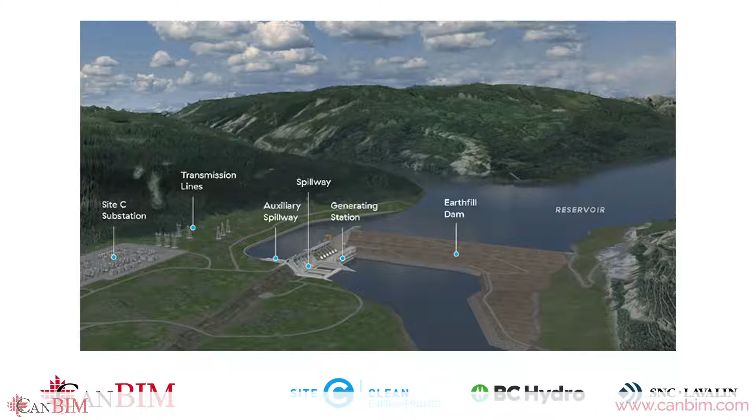So here's an image of the final product after construction. We have the 1 kilometer long earthfill dam on the Peace River. In the back there we have the substation and the transmission lines, and what we'll be talking about today is the generation station and spillway, which is comprised of 4 major components: the powerhouse, the intakes, the penstocks, and the spillway.

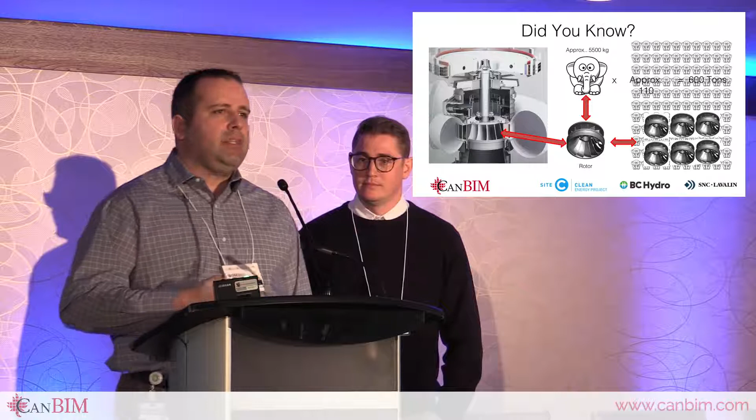Okay, so we have an elephant. That's a white elephant. I don't want to talk about any white elephants related to the project as far as what you've heard on the news. But I do want to make some quick comparisons, some fun facts about the project, and we're going to use this elephant to put it into perspective. What you're looking at here is a slice through one of the turbine and generator units. If we look at just one of the big components there, that's a rotor, and we want to compare it to one of these elephants.

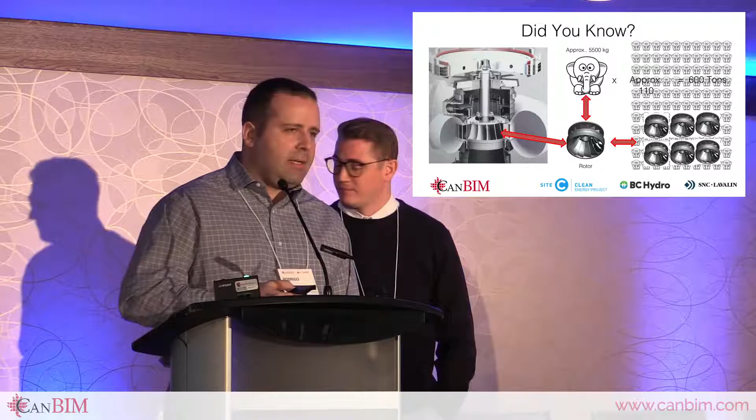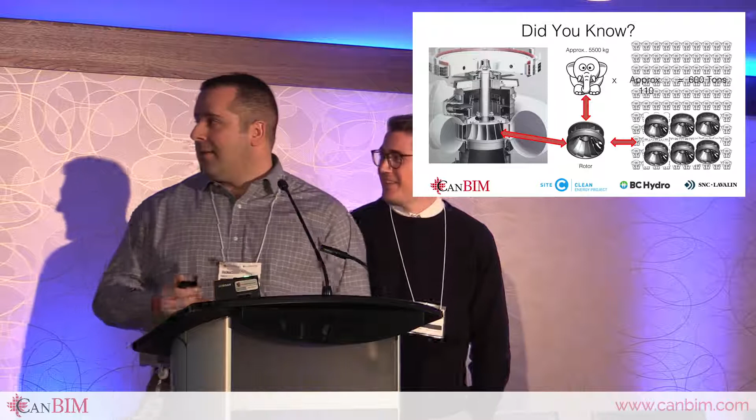Now, a full-grown elephant is approximately 5,500 kilograms. Can anybody guess how many of these elephants it would take to match the weight of that rotor? Any wild guesses? 4? 20? It would take approximately 110 elephants to match the weight of a 600-ton rotor.

Okay, so these are big, heavy parts that we're dealing with inside of the project. Besides the size, we're also dealing with a lot of complexity and a lot of weight, a lot of things that are challenging in here. And of course, there are 6 of these inside of the powerhouse alone, because we have 6 units that are going to be built inside of the powerhouse.

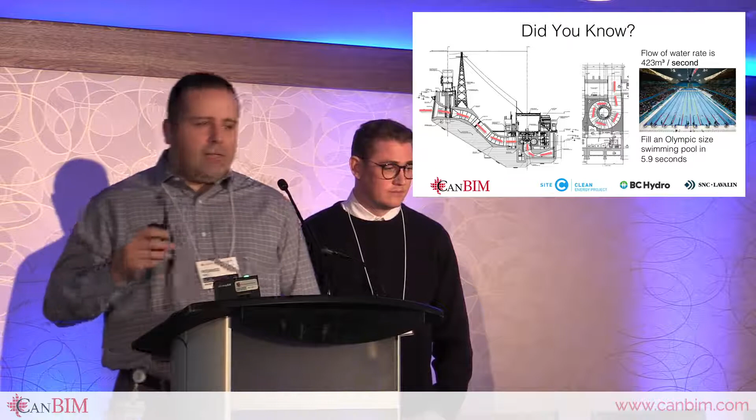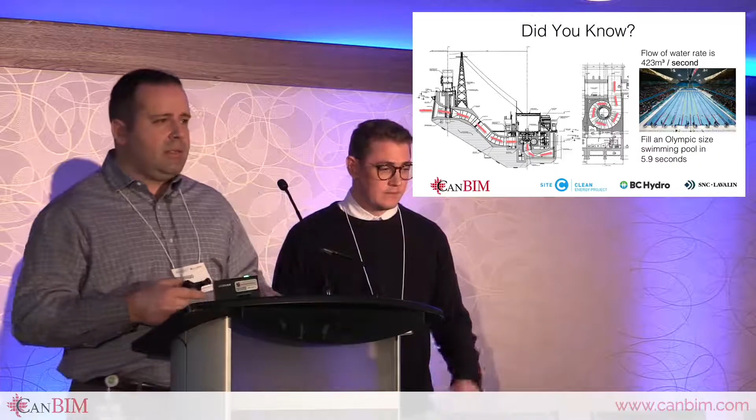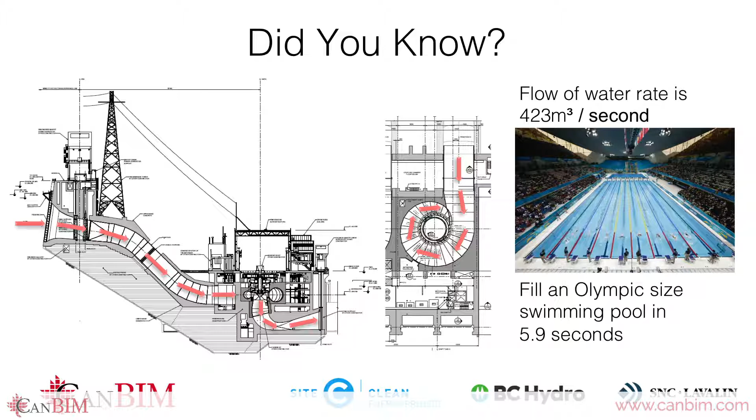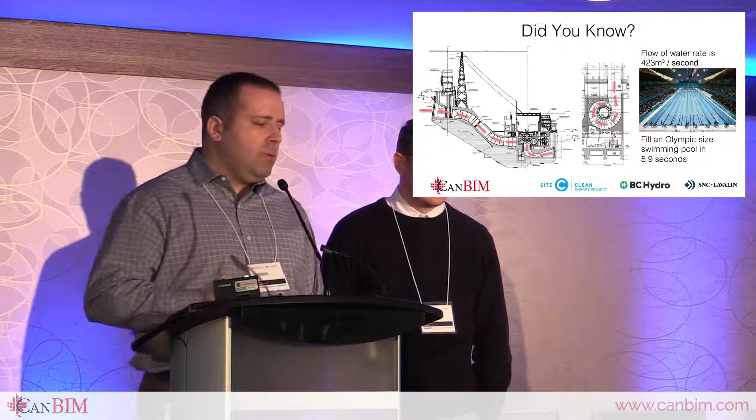Now, the flow rate of water is about 423 cubic meters per second for each unit. So we're talking about a lot of flow of water. That's enough to fill an Olympic-sized swimming pool in about 5.9 seconds. Okay, so we're talking about a lot of water.

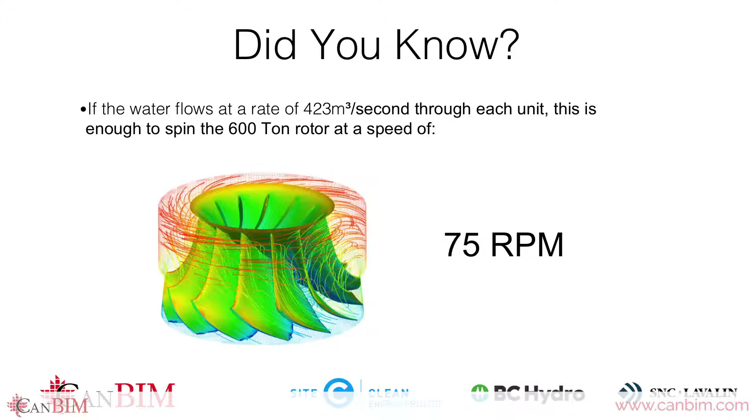Another fun fact is that if we have 423 cubic meters of flow of water going through these water passages, how fast can you spin that 600-ton rotor? The answer is 75 RPM, so 75 revolutions per minute. So it's quite fast. There's a lot of water that travels through this structure. It's a massive structure. We're not dealing with 8 or 10-inch walls. We're dealing with 2 meter, 3 meter thick walls in order to be able to support something like this.

Here's another fun fact. We're at the Pinnacle Hotel. If we take the footprint of this hotel, how many of these hotels would it take to cover the footprint of the generating station and spillway? Any guesses? It's 27. So that's only if I measured that correctly from Google Maps.

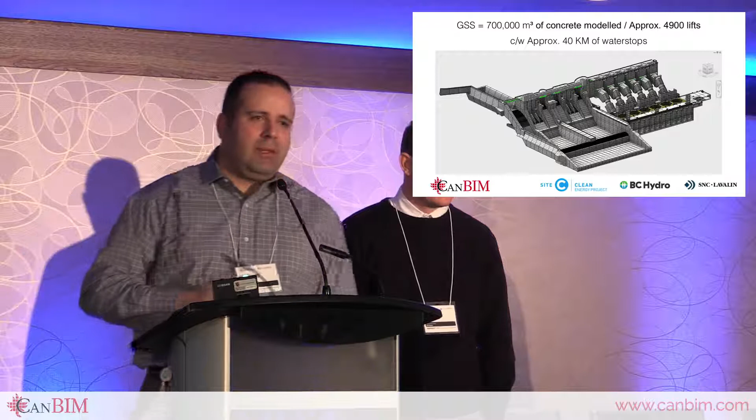Here's a picture of the Revit model, okay, for the concrete alone. And so far we've modeled about 700,000 cubic meters of concrete, equating to about 4,900 lifts. So that's detailed inside of the model. So there's a lot of work that went into that. And there are several models that it is composed of.

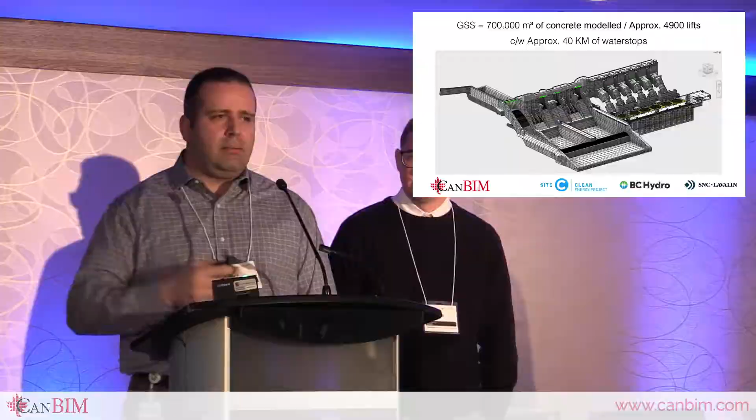That comes complete with about 40 kilometers of water stops that are modeled inside of all the joints inside of this concrete structure. So it's quite a bit of detail and effort that's been put in to put this model together. So I'm going to hand it over to Matt here.

So our client mandate: we knew 3 years ago that we wanted to have a 3D model for Site C. We brought Rodrigo over for his expertise to see if we can get our structures, the 4 components I mentioned earlier, into a 3D model and what the possibilities were, what we could do with those 3D models.

So the initial conversation we had, as BC Hydro and myself included, with Rodrigo, went a little bit like this. Not exactly, but this is kind of the gist of what we talked about. We knew we wanted a 3D model. So Rodrigo said, what kind of 3D model do you want? We knew we wanted a Revit model. So his response was, what do you want out of the Revit model? What do you want to do?

And at this time, we were doing a lot of research. We were looking at the possibilities. So we said, hey, we want all the bells and whistles. And he said, so you want BIM? And we were like, well, what is BIM? And he said, it's all the bells and whistles. So then we said, okay, let's get started. So that was our mandate.

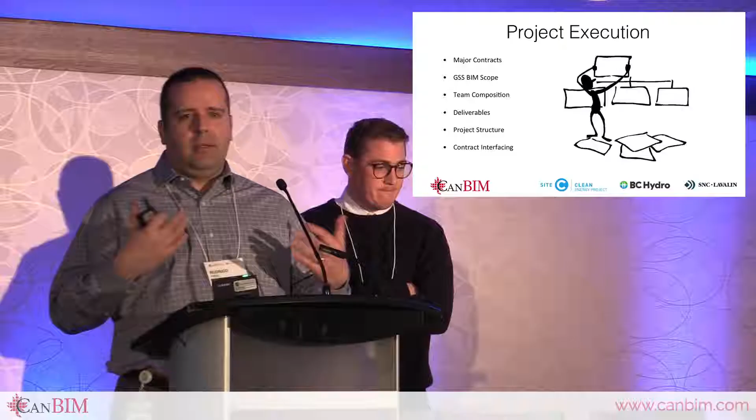There are more contracts in this project, so I can't talk about all of them in 30 minutes, and I don't know about all of them as well, but we'll talk about the generating station and spillway scope. So the GSS, that's what we refer to as generating station and spillway. You'll hear that term a few times through the presentation.

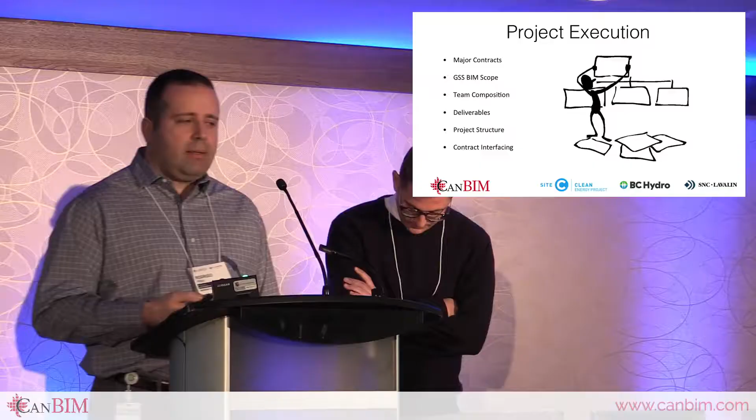So we'll talk about the BIM scope for that. We'll talk about the team composition, what it took to basically get to the point that we're at right now. We'll talk about the deliverables based on what the client requests from the engineering design team, the project structure, what we did to put it together, and also the contract interfacing, which is a hugely important part of how we're delivering this project to all the stakeholders.

So there's five major contracts that we'll discuss here, and like I said, there's a whole bunch of other ones, and I'm trying to cover as much information as possible, but I might miss something. It's just too much information to put into a slide. The generating station and spillway contract is our deliverable right now.

We have the turbines and generators contract we have to interface with. We have the large cranes contract that we have to interface with. We also have hydromechanical equipment for all the stop logs and the gates and all that operate in the structures, and we have to interface with that as well.

And we have what we call the completions contract, which is another one of the really large contracts for the project, and that basically covers most of the mechanical, electrical systems, plus other architectural and structural components that are going to be finalized after the main part of the work.

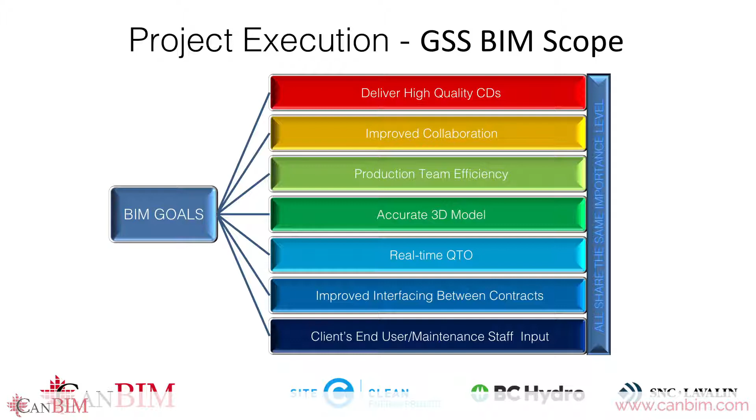So as far as the BIM scope, the BIM goals for the project were to deliver, first of all, high-quality construction documents that were coordinated. We're talking about a lot of documents here, so they need to be coordinated somehow to reduce errors. When we're dealing with construction, reducing errors is basically a time-saving and a cost-saving factor, right? So we wanted to have improved collaboration.

We have an extremely large team working on this project on the design side, but at times it feels like they're working in silos. Everybody's doing their design, worrying about their deliverables, and the collaboration aspect of it kind of gets left behind. So we wanted to create an environment where collaboration was not just improved, but forced upon people to be able to do their work.

Another one of the factors was to improve the team efficiency. We had a lot of work to deliver in a short amount of time, as you will see later on in the slide, and we needed to do it efficiently and make sure that we were delivering on time because of contract restrictions, or consequences of being late.

We want to be able to do an accurate 3D model, so the approach that we're taking is that we're modeling as much as we can. So what you see in the drawings is basically coming from a 3D model, at about 90% of the content that's in there. Okay.

We wanted to do real-time cost estimation because there's a lot of changes going on in a project like this. We do a design, the design goes through the user requirements, we get input from many parties, and then the design changes. But there's cost implications, and the client needs to understand what it would cost to make changes that are required by everybody. So we wanted to have all the major components that would have a significant impact and have that information real time.

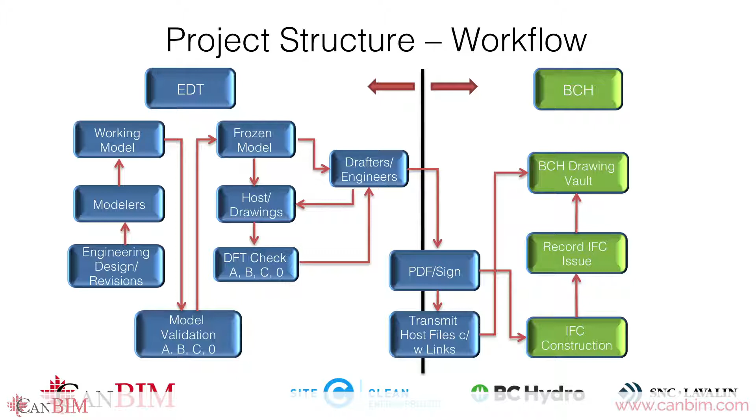So here's a project structure workflow. I'll go through fast. Basically, it's from the EDT and how it gets to BC Hydro. All the design and revisions are fed to the modelers. The modelers are doing the work inside the working models. We go through the validation phase. If that's good, we freeze the model. The models are linked into the host files. The drafters and engineers work on the annotation for those. Then it goes through the draft check. If there's any changes, it just goes through the loop again.

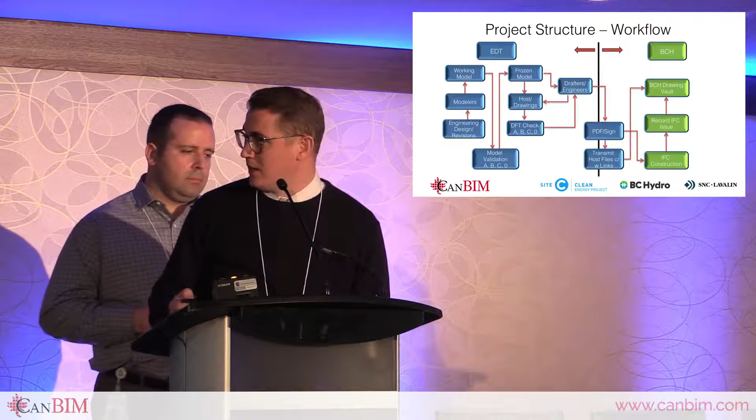If it's all good to go and we're ready for Rev 0, we issue PDFs that are digitally signed, APEG signed and sealed. At the same time, we e-transmit the host files with all the models included. Those are shipped out to BC Hydro for construction, and then eventually there will be a record issue, and then the PDF and the file will end up in our BC Hydro drawing vault.

Okay, so does that sound complicated, or does that sound like a typical workflow? So it's a lot of packages, there's a lot of deliverables that we have, so it's not an easy task to be able to plan this out. We tried to do it in such a way that it was flexible enough that we could produce numerous packages without altering the process as we were going along.

Now inside the project, and in just about every office that I've worked in, and I'm sure a lot of you have, there are challenges, especially when it comes to implementing BIM. BIM is not a new thing anymore. It's been around for who knows how many, 15 years or so, but there's still a lot of people that are not well-versed on it. There's people that reject it. There's people that are afraid of it, and so they create challenges for us.

So as far as people is concerned, one of the biggest challenges was resistance. And this is a large project. We have about 300 people working on here. We have people that were, let's go for it. They're all gung ho about it. And then we have people that didn't want to have anything to do with it. And that created challenges in its own because they didn't want to change the way that they work.

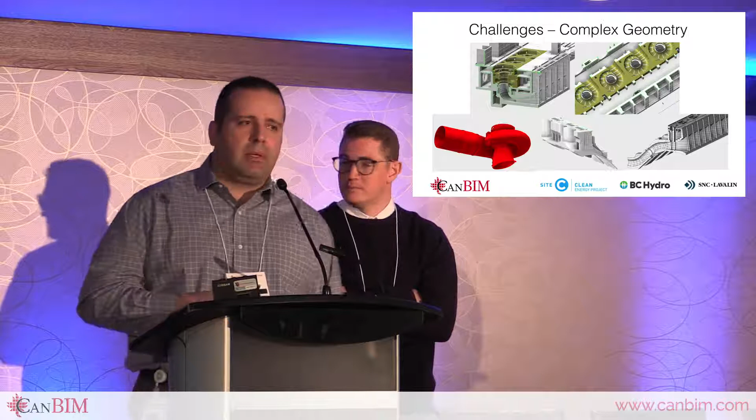So some of the other challenges that we have, and this is more to do with modeling, we're dealing with some pretty complex geometry. At times Revit did not handle this geometry inside of it as well as we wanted to. And I could explain to all of you what this geometry is. I'm not going to get too deep into it, but it's complex, and it's not easy to create inside of Revit. So we had to use alternative software to be able to create the complex geometry and bring it into Revit to be able to use it and make this happen. But it works. So far, we're doing good. You can see a lot of the stuff that's in the models here is what we have so far. So

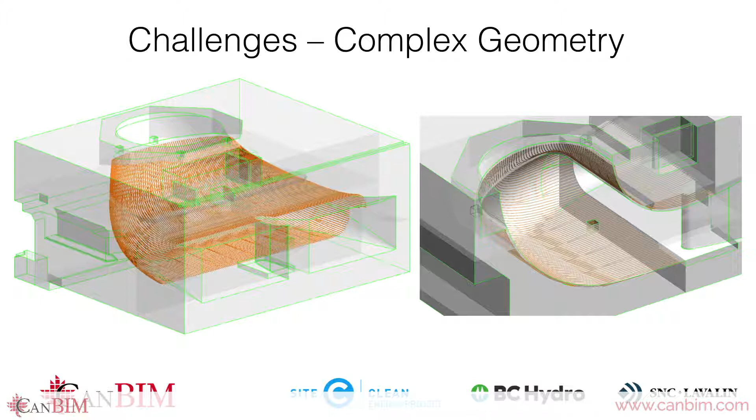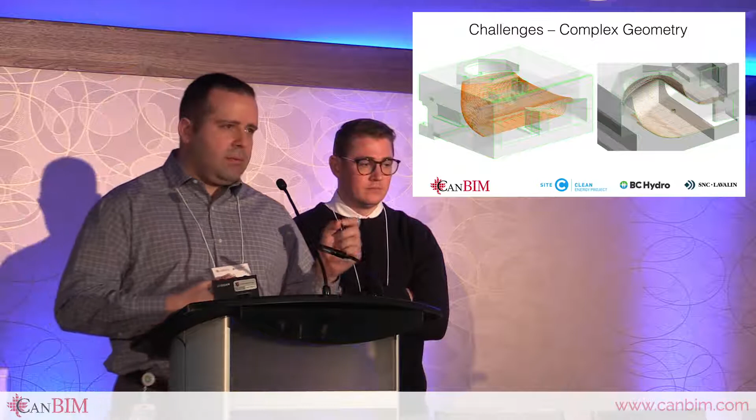this is a snapshot. Now, we didn't model rebar because it's a massive project. As you can see, 700,000 cubic meters of concrete. That's a lot of rebar. We didn't have enough resources to be able to have full-time rebar modelers and somebody who can handle all that. But we did take the most complicated part of the project where the rebar is extremely important and model the 3D rebar around it. Okay, and that's around the draft tubes. Okay, and that's because we needed to make sure that we had enough concrete coverage on these massive rebar bars that are around this draft tube. So we had to pick and choose what we tackle inside of the project according to the skills and resources that we had.

Successes. Okay. So the people successes. First of all, we managed to achieve the BC Hydro Revit standards. Now, how many of you guys have done work for BC Hydro before? How many know of their CAD standards? How many like them? Sorry. So they're very complicated, very convoluted. I mean, you can't do a straight transfer from Revit to AutoCAD to begin with, but trying to match what they do is a little bit complicated. So we managed to implement that, and it's being used across the entire project, which was a lot of work. We worked on this quite a bit.

The overall team adoption: before, we had people that didn't even want to look at a model, now we have people that can't live without a model. They can't do design without it, or they can't, you know, make decisions without it, so that's a great thing. And we're very happy about that aspect of it. The other success is the amount of input and how happy the users are in that they got to participate at a different level in how this facility is going to look for them and what it's going to have inside of it so that they can do their work. We've used tools like Navisworks and other 3D reviewing software, as well as virtual reality, so that they can actually see the facility and walk inside of it before we build it.